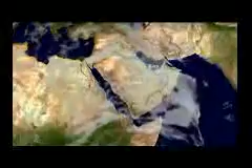Water scarcity, energy crisis, population growth, rapid urbanization. These are all issues that call for efficient, long-lasting solutions. Located in the middle of the Persian Gulf, between the Qatari Peninsula and the east coast of Saudi Arabia, the Bahrain archipelago is faced with every one of these issues.

Heavy withdrawals are made from its natural reserves, which are fast declining. It's the case for both oil and gas, its main fossil fuel resources, but also for water. The island is under permanent water stress. Add to that an arid climate with very high temperatures in summer, resulting in frequent water cut-offs. And yet, Bahrain's urban areas are growing rapidly, and so is tourism. The island has to deal with a rising demand for water.

Bahrain is well aware of the risks for its future and has set out to develop a comprehensive management model for its resources that is cost-effective and adapted to local conditions. The idea is to intertwine the production of energy from natural gas with the production of drinking water.

The government of Bahrain has been encouraging private operators to invest in this project since 2002. In January 2006, it turned to a consortium called HPC, with which it signed a 20-year contract for water and electricity supply. The contract includes the acquisition and joint operation by HPC of a power plant and a seawater desalination plant in Al-Hidd on the island of Muharraq. It also plans for the upgrade of these facilities to triple their capacity in a record time of 22 months.

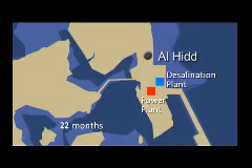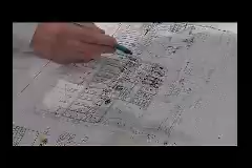Following an international call for tenders launched by HPC, SIDEM, a Veolia Water Solutions and Technologies subsidiary specialized in seawater desalination, was chosen to take up this challenge. SIDEM's assignment was to build a new, very large desalination plant that would offer extremely efficient performance. On top of that, the company had to meet a very tight schedule under which the plant would come into service in different stages. In fact, the first units were to be commissioned just 14 months after contract signature.

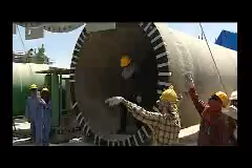To take up this technical and human challenge, more than 80 engineers worked together during the design phase, and 2,000 people were on site during the peak construction period.

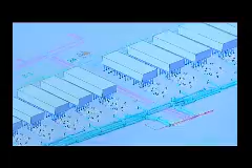The seawater is withdrawn and filtered by a pumping station before being treated by the MED thermal desalination process. The plant is made up of 10 units that operate in parallel and are each capable of producing 27,300 cubic meters of drinking water per day. The system is therefore very flexible.

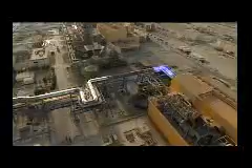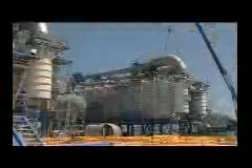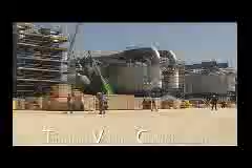The energy needed by the process is supplied by the power plant located right next door. The desalination plant recovers the low-pressure steam at the outlet of the power plant's turbines. In other words, the desalination plant is powered by low-grade byproduct energy that is recovered at the end of the electricity generation cycle and would otherwise be lost. This energy is then used to evaporate the seawater at low temperature. In addition, the desalination plant's performance is upgraded by a thermocompressor that enables part of the steam produced to be recycled. Taken as a whole, the system makes MED technology a very advantageous solution in terms of operating cost.

The brine generated by the process is diluted, and then it is discharged into the sea at a temperature that's never more than 3 degrees centigrade higher than the temperature of the seawater. SIDEM is therefore in strict compliance with international discharge standards intended to protect the environment. Before being distributed to Bahrain, the drinking water produced is remineralized in order to meet the World Health Organization's potability standards.

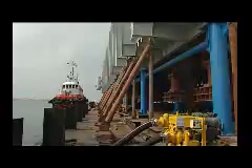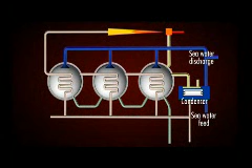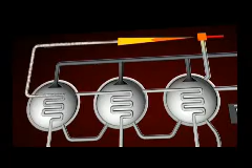Multiple effect distillation works by evaporating seawater and condensing the steam in a series of vacuum distillation cells. The aim of the process is to separate the salt from the seawater. Each cell is fitted with horizontal heat exchange tubes. Steam is introduced into the tubes of the first cell, while non-heated seawater is sprayed on top of the bundle and runs down the outside of the tubes. While cooling the tubes, the seawater causes the steam to condense into fresh water inside the tubes.

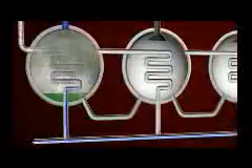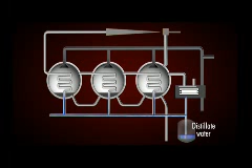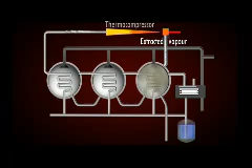At the same time, the seawater flowing outside the tubes partly evaporates. The new steam is then introduced inside the tubes of the next cell. This operation can be repeated several times, with each unit able to contain a series of 12 cells. At each stage, fresh water is collected at the exit of the bundles and brine is recovered at the bottom of the cells. The steam from the last cell is recycled in the first cell by means of the thermocompressor.

It took SIDEM less than 2 years to build this plant, which is unique in terms of its capacity and its energy performance. SIDEM is now training the personnel of HPC on how to operate the plant, and will continue to do so for the next 2 years.

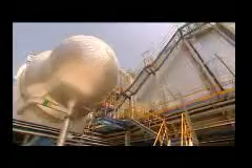The Bahrain project has also established the reputation of the multiple effect distillation process, because it proves that MED, which was previously suited for small plants, can now be applied to very large flows. There is no doubt that the performance achieved in Bahrain will lead to yet more major projects for SIDEM and will strengthen its position as the world leader in thermal desalination.